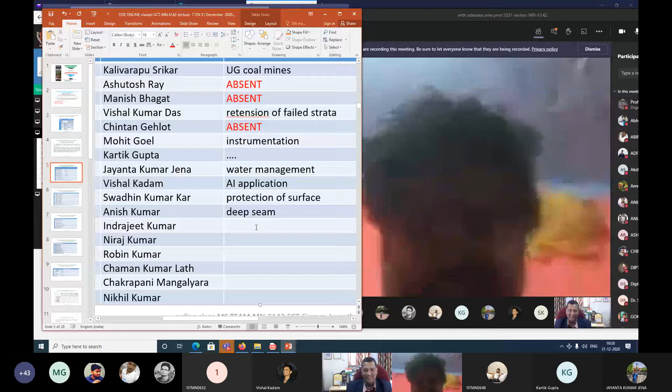Strata control in thick seam mining. Deep seam mining. Don't waste time, tell me. That is a general data control related to the subject only. So you are interested in deep seam mining.

Indrajit, be fast, you should finish within 10 minutes. Show your face in 2020 because next year will be 21. Data control, you should not use that word. Tell what is your interest during depillaring, section of the board and depillaring. Had you done some more exercise, you should have told depillaring in multiple seams, thick seams, inclined seams, so many things are there.

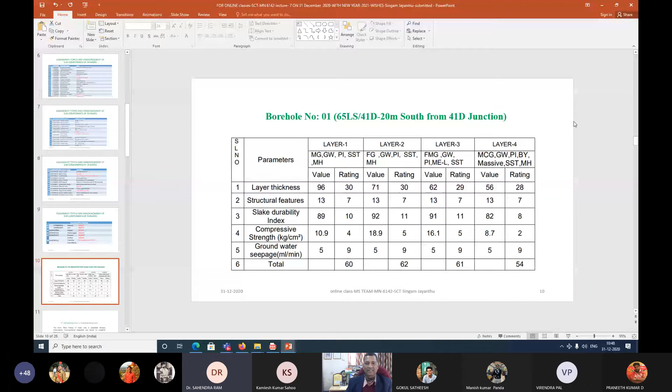Yesterday in the last class we discussed that a roof fall accident took place at Vakilapalli mine. Are you able to see the slide? Yes sir, yes sir, yes sir.

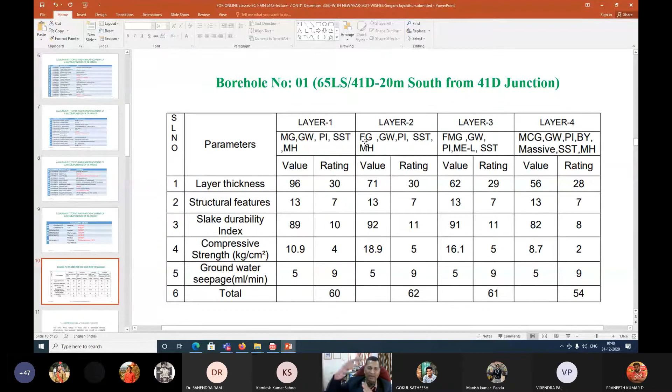So there are layers, you may note down layer 1, layer 2, layer 3, layer 4. For each layer, these things, because already I have sent this to everybody. You need not write, but try to understand. And if you have any doubts, you can ask me also.

After just 5-10 minutes I will hand over to our Professor Sahendra Ram to share his experiences on strata control related to our module 1. He has done a lot of work, so that is a great opportunity for all our beloved students to hear him share his experiences on these different geological disturbances or strata control, as a scientist, whatever he has done. That is very good experience you can hear. Just 5 minutes only I will tell about this.

For layer 1, layer 2, because there are different values of layer thickness, for example 96 centimeter, right, then different values are given. Depending on that value, their ratings are given. So ultimately all this is CMRI and ISM rock mass classification, which was developed already, I told you, by Professor A.K. Ghosh Saab and our former colleague scientists Dr. N.M. Raju Saab and Venkateshwarlu, all those people, right? So this is 60 for layer 1, 62 for layer 2, 61 for layer 3, and 54 for layer 4.

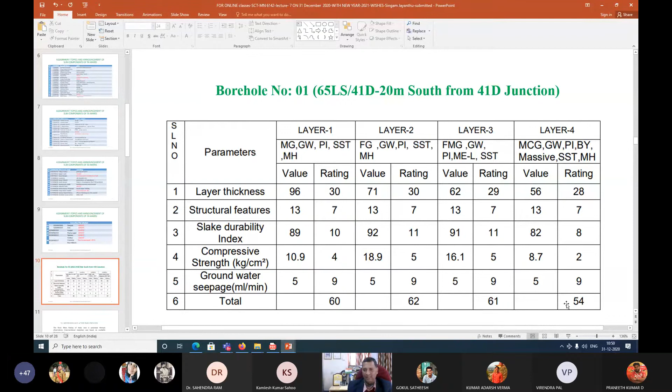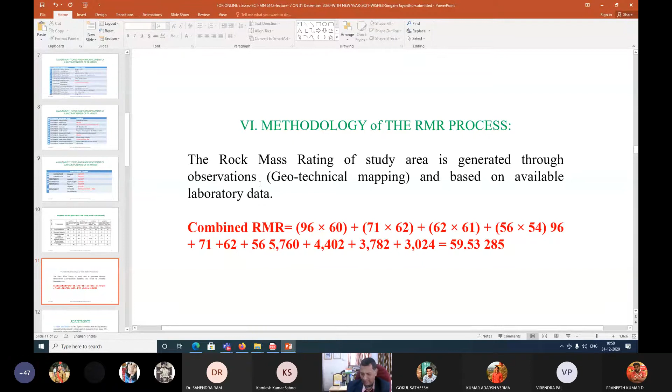So we are supposed to consider that, and then ultimately we are giving a combined rock mass rating. When you consider that along with its rating, and then its thickness, and then its rock mass rating, we will be getting it, and based on that we will be doing some adjustments also. What is the meaning of adjustment? Because when this rock mass rating was developed, there were some conditions - I know personally all that data, and while doing that I was there with them, right? They collected a lot of data from around 60-70 mines, and then whatever data was collected, they tried to give some type of factorial analysis, sensitivity analysis, and then an empirical model.

And that empirical model, whatever is developed, cannot be utilized for conditions beyond the data. That means when I have used data up to only 250 meter or 200 meter depth cover, I cannot directly use that empirical formulation to other mines which are at 500 meter or 400 meter depth, something like that - very simple to understand. That is the difference between empirical models, analytical models, and numerical models. There are different limitations for that.

For that purpose, in this mine, as the depth is less than 250 meter, no adjustment is required, right? But the present working depth is near to 264 meters. Hence 10% reduction is made, and these details are already there when you go into what the rock mass rating and its adjustments are for which range of depth, how much adjustment is there, how much ultimately it is supposed to be reduced - rock mass rating reduction by 10%.

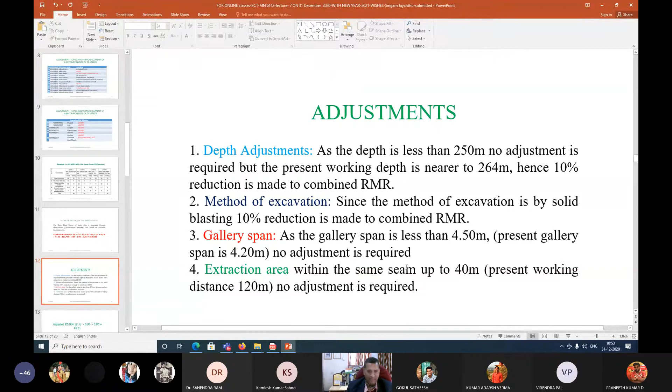So after giving these adjustments, we arrive at the final adjusted rock mass rating, which was already given as around 48. Under classification they have given so many details, but I am not going into that at present.

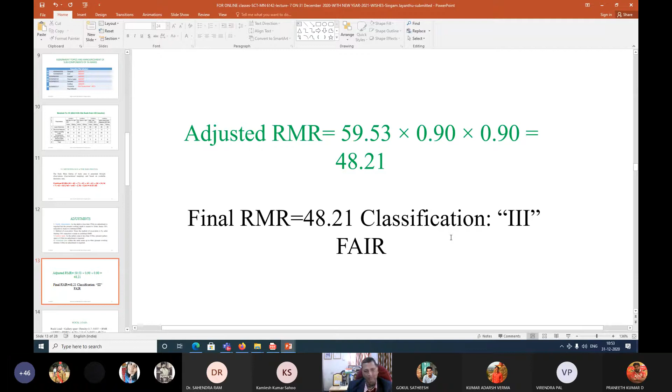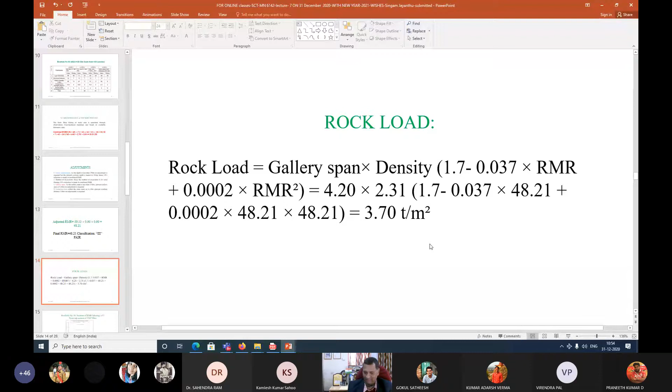In the classification, this falls under category 3 as a fair category. Not only now, but back in 1988, our beloved Professor A.K. Ghosh and his team, in the PAL committee reports, gave a lot of details, and based on that this rock load is estimated. There is an equation involving the width of gallery span, density, and rock mass rating. Based on that, rock load comes to 3.7 tons per meter square, and this gives the lithology with rock mass ratings of individual layers.

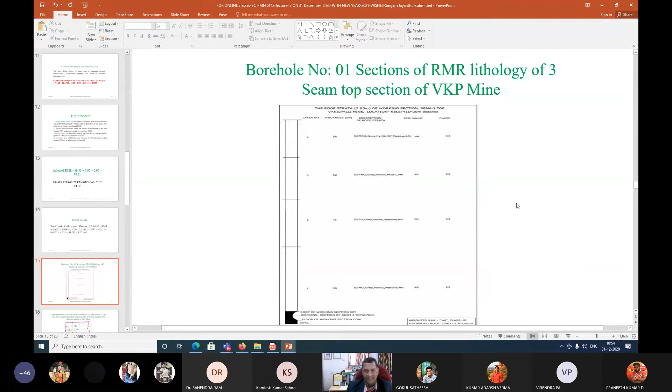Since I already sent these PPTs to everybody on NITRIS, I am not spending much time on this, as these plans were shown to you at that time.

I hope you have seen the recent roof fall accident at Vakilpalli mine, where we lost our Naveen overman, and we are conducting that investigation. If time permits, I can also take you people into that mine through video and photographs, if I haven't already shown you before.

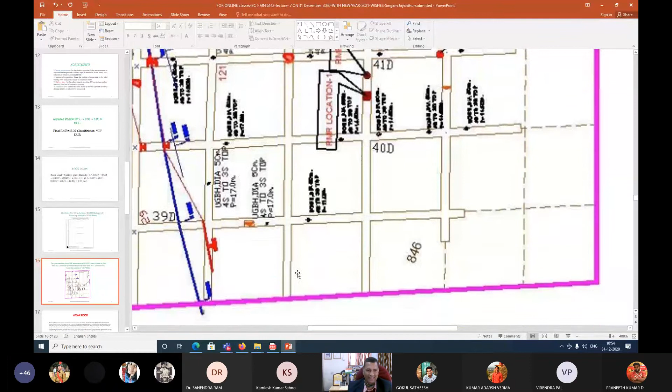In which these type of faults are there, and other geological disturbances. Now you can see different faults. So many things were already shown in previous plans to my beloved students, along with other weak rocks, which we will discuss later.

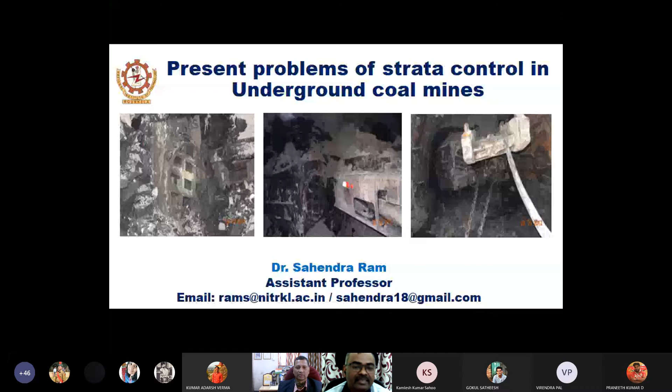Rock mass: generally coal is deposited during sedimentary formation, so rock mass in itself is a strata control problem, because of the presence of different geological discontinuities, depth of cover and stress. Generally stress changes with depth of cover, so it has a significant influence over the mining activity.

Thick seam mining: thick seam, 4.8 meter and above, is defined as thick seam mining in Indian coal mines. Generally strata movement is huge in case of thick seam mining activity compared to the normal height of extraction, and in multi-seam working there is a prime concern of parting stability between the two coal seams. So during extraction of multi-seam, strata control behavior is also challenging for us.

Inclination of the coal seam: due to incline, the stability and strength of geotechnical structures like pillar, rib, snook gets diluted and reduced. So it is also a gray area for research. Prediction of roof falls: if you visit an underground mine where depillaring is going on, everyone will ask about the probability of roof fall, when the roof fall will be happening, and the safety factor.

It is also important to know the impact of underground working on overlying strata. You must know the bulking factor for different rock mass structures - what it will be for weak rock strata versus strong and massive strata, and support design at higher stress conditions. At higher depth of cover, we have to deal with the stress condition, since there is significant influence of higher stress like spalling, fracturing, and crushing of pillars. So accordingly we have to design the support system.

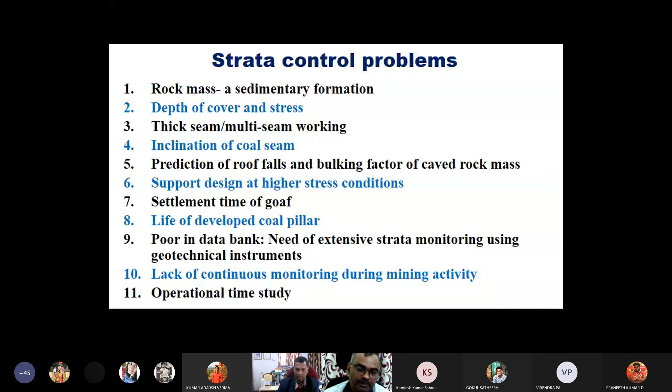The last one is operational time study - what we experienced and observed during the field study. Operational time study means what time is taken to complete a slice, what time is taken to complete a sleeve, and what time is taken for roof fall after extraction of pillar. This is also one of the important parts of the strata control program.

Now come to the rock mass. As we said, it is a sedimentary formation, so it is full of huge uncertainty for the mining area because there is an inhomogeneous nature, anisotropic condition, presence of geological discontinuity, disturbances like fault, fold, sandstone, stone intrusion, dike, etc., cleat in coal mass, joint in sandstone, cross stratification, and the biggest enemy for mining area is hidden slip. It has caused a number of accidents in mines in the last decade, along with the presence of dirt bands.

In the field, rock mass is found ranging from weak laminated to strong like sill, and massive roof strata. Under this condition, you have to design suitably the geotechnical structure like width, pillar size, snook size, fender size, and support, and prediction of roof depends also on cavability nature. We have a formula for cavability index based on the behavior of rock mass in longwall.

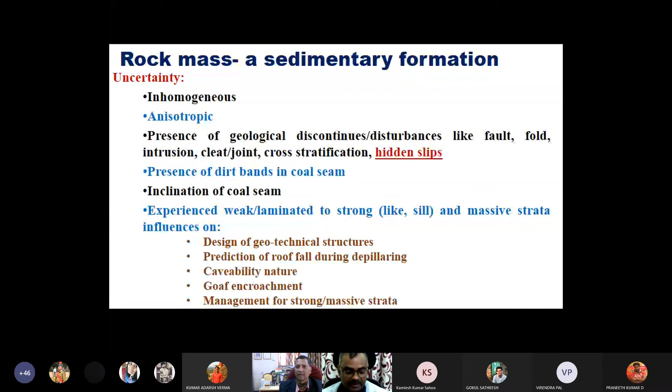But we don't have the cavability nature of rock mass for board and pillar working, because board and pillar is a broken nature of working - we have to leave different remnants which provide some resistance in hanging roof inside the goaf. So this is also a gray area for estimation of cavability index in board and pillar working, including encroachment and management of strong and massive structures like in some mines. These are the challenges for mining engineers.

Now come to the depth of cover. Depth of cover and stress are interrelated.

Stress are... here I interrupt. Very good.

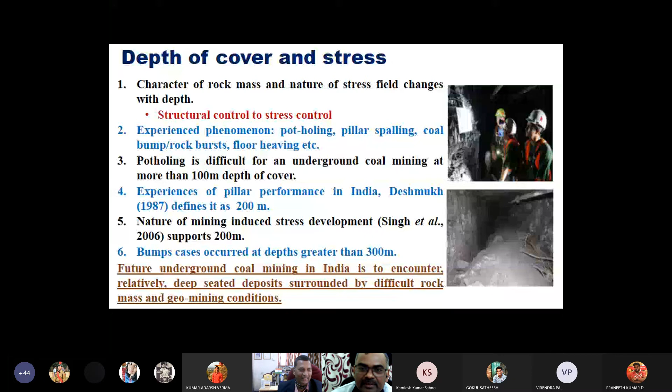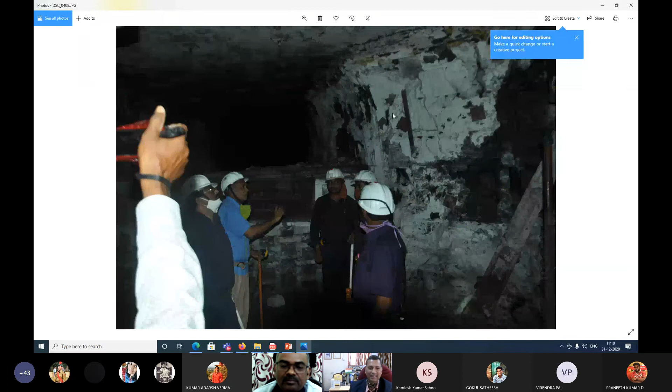This is the VKP mine where, because of these hidden slips, an accident took place where we lost lives. This is that mine - we are entering inside the mine to the place where hidden slips are there. Now you see, this is us going inside. He is our Maharshi, COVID-19 warrior, MTech scholar. This is the place where the accident took place with the LHDs working.

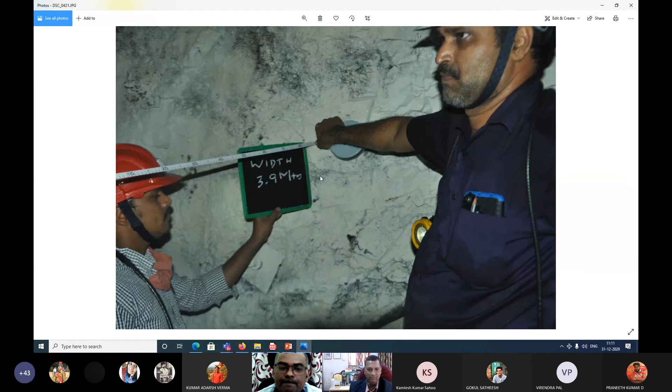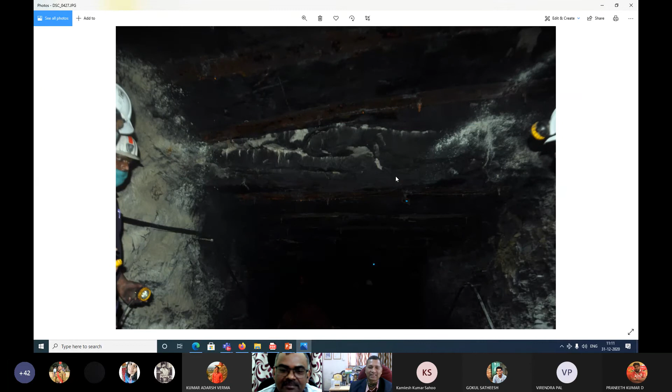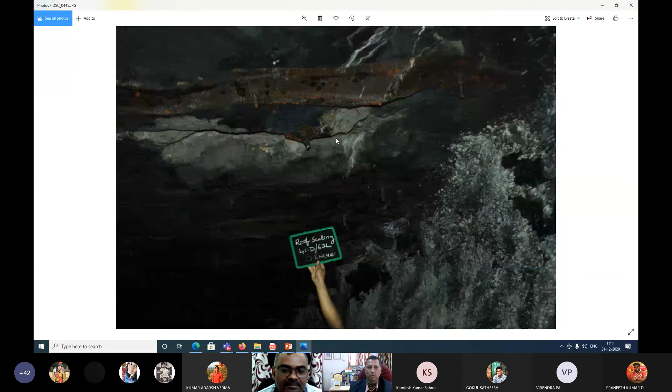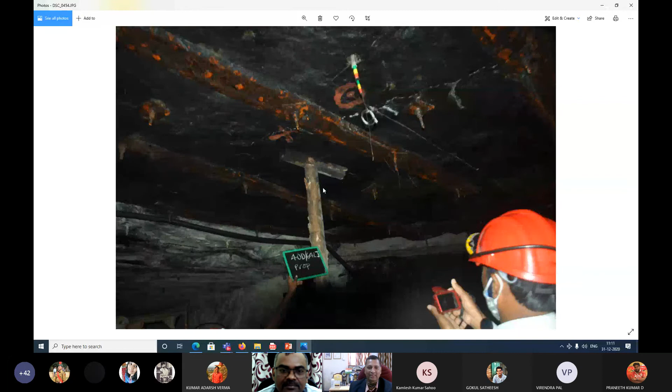You see the different typical situations and conditions where width is 4.3, 40, and then you see how the conditions are there - roof supports, W straps, roof bolts, and even some type of disturbance in the roof, some scaling happened here. This is a place 40 deep of 62 level, then instrumentation nicely shows how telltales are looking, and then 40 deep 64 level with W straps.

This is we are nearing the place of that accident where we lost our Naveen because of the hidden slips. This is what is that roof scaling. This is specifically done so that our beloved students of strata control technology understand all the conditions that led to loss of one human life, which is invaluable. Even if you pay crores of rupees, we will not get the life back. But this is the importance of our strata control engineer. This is where the dead body of our Naveen was removed, and this is that fatal accident.

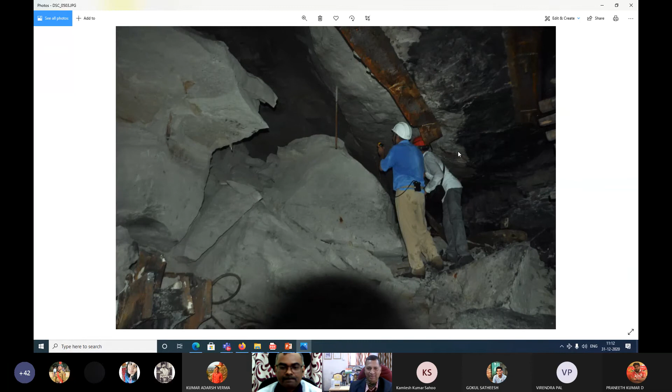Now you see that case, because of hidden slips and by the fault planes and other disturbances, how it is. And this is our COVID-19 warriors, how they are investigating and provided all that information for the benefit of our strata control students.

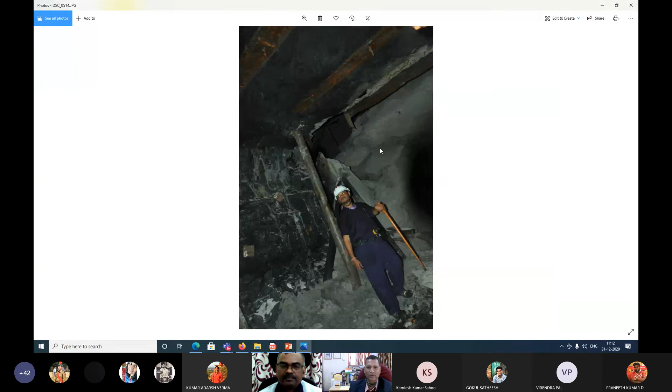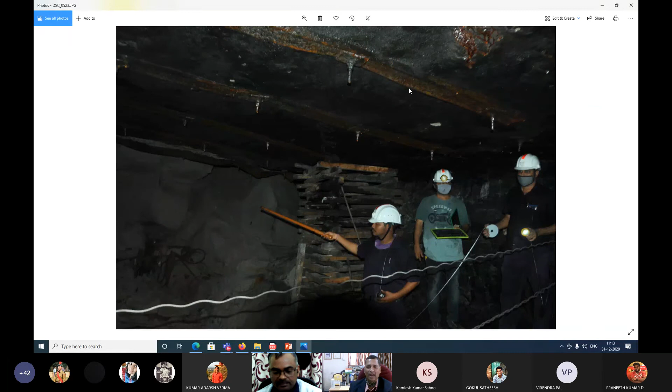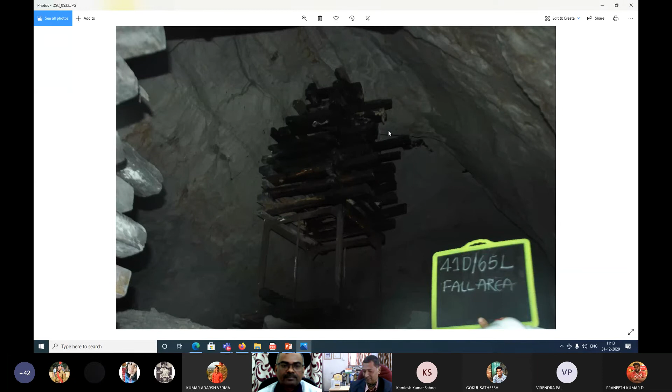This is what I wanted to show now near that junction, how it is being supported, and as a part of investigation, how we are considering all the parameters of this roof fall. This is that issue, and I wish that we should be in a position to protect our miners by improving the stability against this type of geological disturbances.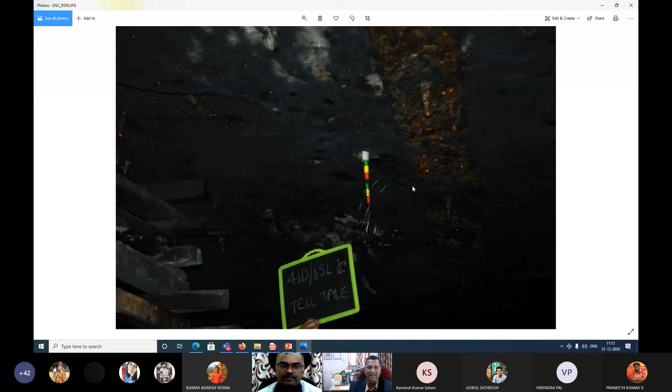With my limited experience of 3.5 decades, I can say there may be some conditions which may not be controlled by us, and there is no other way but to close down that mine. But our best efforts we can make to protect the workings with safety and stability, and the safety of our persons. And that is what is our strata control engineer's job.

And you see side supports are also there, bolting, all those things. Like that, there are so many. I am not doing all the things.

Sir, I can summarize. Yes. Nitin Singh. Tell the name. Sir, name. Nitin Singh. Nitin, very good, Nitin. Nitin summarizing. Only 30 seconds.

Sir, yes, sir. We have started with the borehole number and the layer. Then we have come to the methodology of RMR, rock mass rating, and the different types of adjustment that we should do, that we have seen. Then handing over to sir, sir has taught us about the strata control problems. He has shown the different types of problems that are there, and today he has discussed about the rock mass sediment formation. Detailed discussion was there, like the uncertainty of inhomogeneous and anisotropic nature, presence of dirt band, etc., sir.